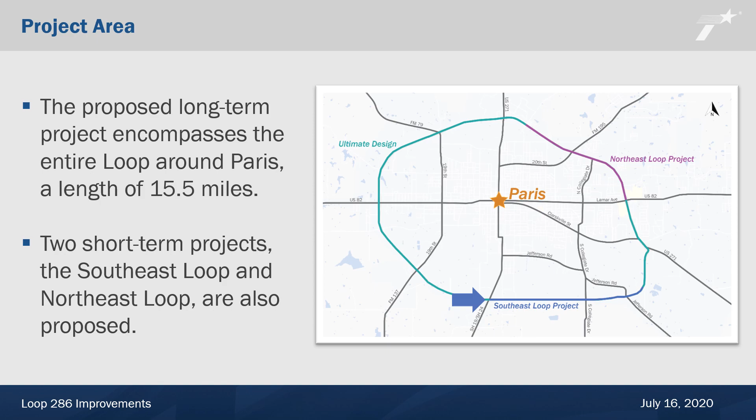The proposed long-term project, referred to as the ultimate design, includes improvements for the entire loop around Paris, a project length of 15.5 miles. Two short-term projects that align with the ultimate design vision are also proposed and include improvements for the Southeast Loop, shown in blue, and Northeast Loop, shown in purple.

Since the project began in September 2018, the department has worked to collect information about needed improvements, develop alternatives, and seek input from the public and key stakeholders on proposed improvements for Loop 286. The project team developed various alternatives for Loop 286 that were presented at a public meeting in April 2019. The department used feedback from this first public meeting to help select a preferred alternative and begin detailed schematic design.

Following this public meeting, the department will develop environmental documents for the proposed interim projects and finalize schematic designs for improvements to the entire loop. The department has tentatively scheduled a public hearing for the fall of 2020 and anticipates completion of environmental studies and schematic designs for the Loop 286 Improvements Project in the spring of 2021. However, all dates are subject to change.

Public involvement has been an important part of the Loop 286 Improvements Project. At the public meeting held in April 2019, the department gathered initial input on current issues and potential improvements to Loop 286. In addition to written comments received during and after the public meeting, the department collected feedback through an interactive electronic survey. Public comments and survey responses showed that enhancing safety, reducing congestion, and economic growth were top priorities for improvements to Loop 286.

Now that we have reviewed the project location, purpose, timeline, and need, we will provide more details about the proposed improvements, starting with the ultimate design, which encompasses the entire loop around Paris.

The ultimate design is a long-range plan that serves as a blueprint for the future of Loop 286. Funding for the entire ultimate design has not been identified. However, smaller segments of the design could be completed as funding becomes available.

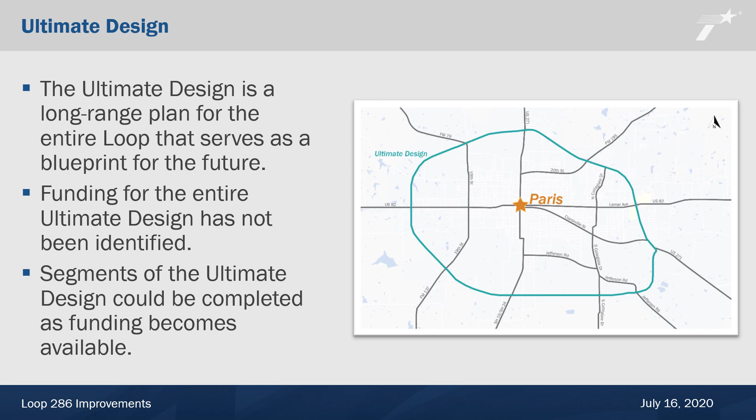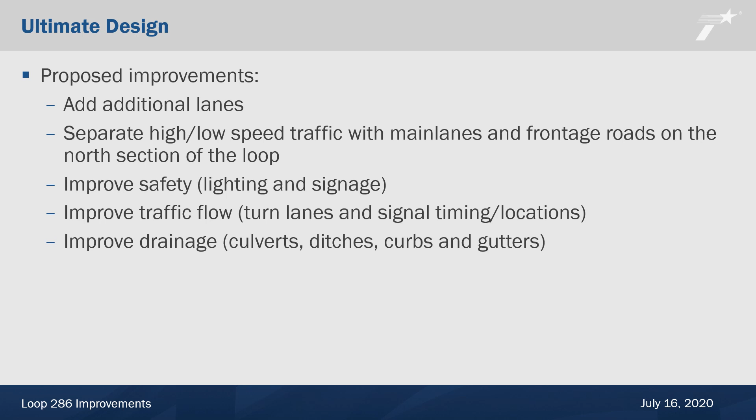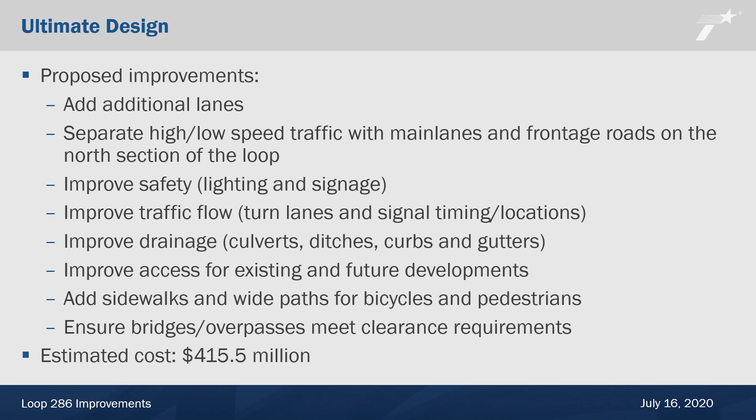Proposed improvements for the ultimate design include adding additional lanes, separating high and low speed traffic with main lanes and frontage roads on the north section of the loop, improving safety with additional lighting and signage, improving traffic flow with additional turn lanes and adjustments to signal timing and locations, improving drainage by adding culverts, ditches, curbs, and gutters, improving access for existing and future developments, adding sidewalks and wide paths for bicycles and pedestrians, and ensuring bridges and overpasses meet clearance requirements. The estimated cost for the ultimate design is $415.5 million.

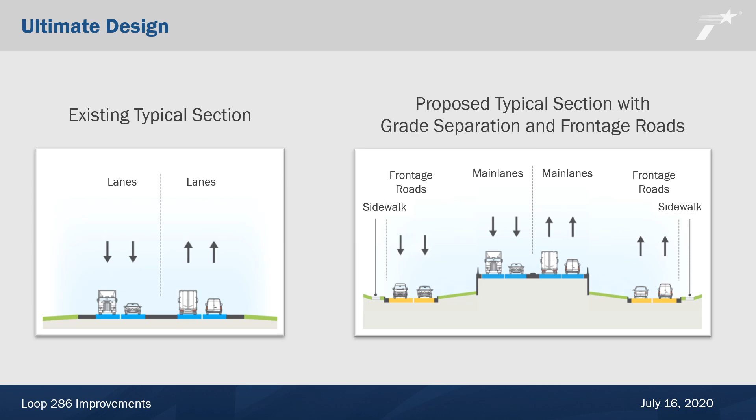The proposed ultimate design will be a grade-separated roadway with 4 elevated main lanes and frontage roads on each side, similar to the image shown on the right. The elevated main lanes allow high-speed traffic to bypass intersections, while the frontage roads allow slower moving traffic to safely access residential and commercial developments. The roadway improvements also include sidewalks and wide paths for bicycles and pedestrians.

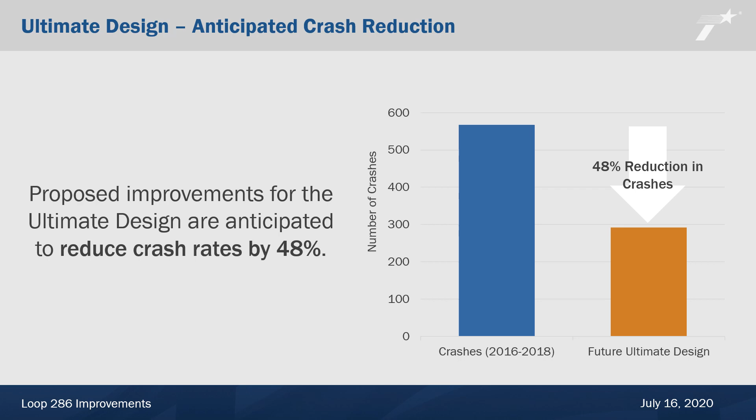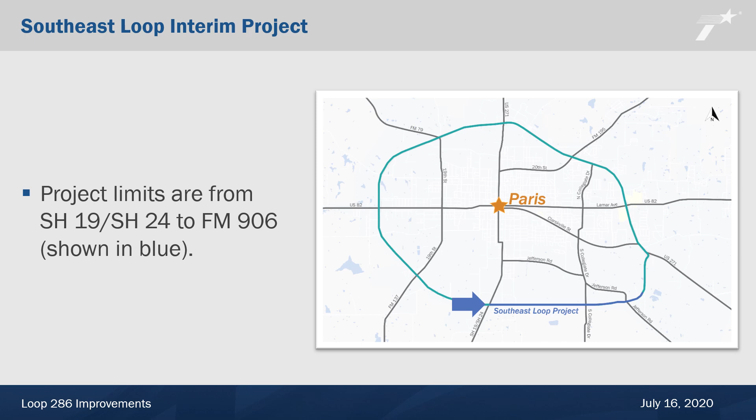Since funding for the entire ultimate design has not been identified, the department is proposing 2 short-term projects that could be completed as soon as funding becomes available. First is the Southeast Loop Interim Project from SH19, SH24 to FM 906, as shown on the map in blue.

Proposed improvements for the Southeast Loop Interim Project include expanding the roadway to 4 lanes. This is the only section of Loop 286 that is currently a 2-lane roadway, which causes a pinch point for traffic, and adding a wide path for bicycles and pedestrians.

Improving the intersection of South Collegiate Drive near Paris High School. This intersection has been identified as a prioritized area for safety improvements due to severe crashes that have occurred in recent years. The estimated cost for the Southeast Loop Interim Project is $20.2 million.

Crash data for the Southeast Loop shows that crashes are not as frequent as the Northeast Loop, but are typically more severe, which makes it a prioritized area for safety improvements.

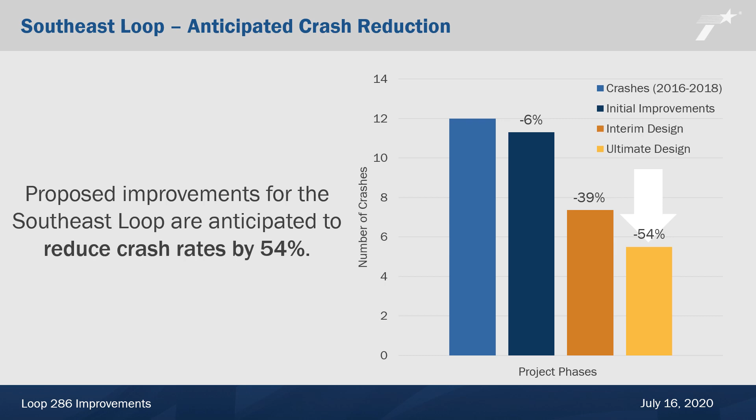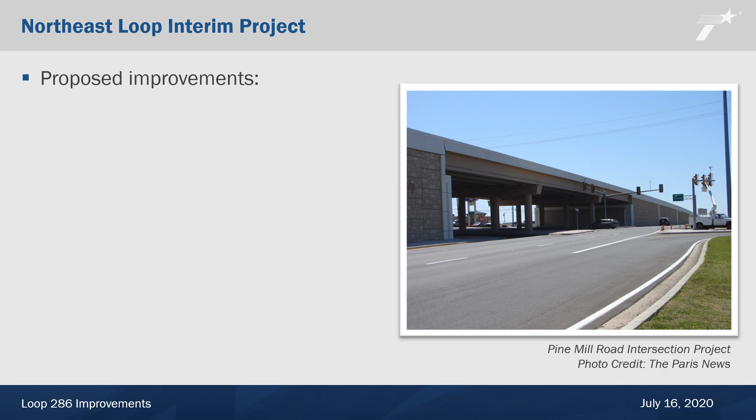Proposed improvements for the Northeast Loop Interim project include adding lanes and an overpass at North Collegiate Drive, adding sidewalks and paths for bicycles and pedestrians, improving safety with lighting, advance warning signs, and flashing beacons, and improving drainage by adding culverts, curbs, and gutters.

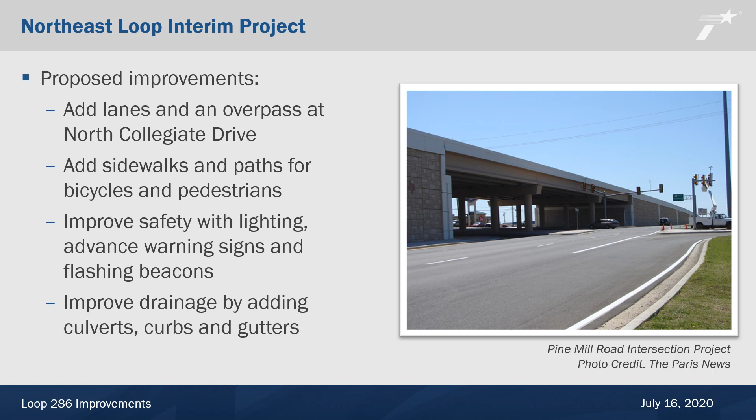Improving traffic flow by adjusting signal timing based on traffic needs, installing traffic signals at some stop-controlled intersections, adjusting the number of left turn and through lanes based on traffic analysis, and improving driveway access for existing and future developments.

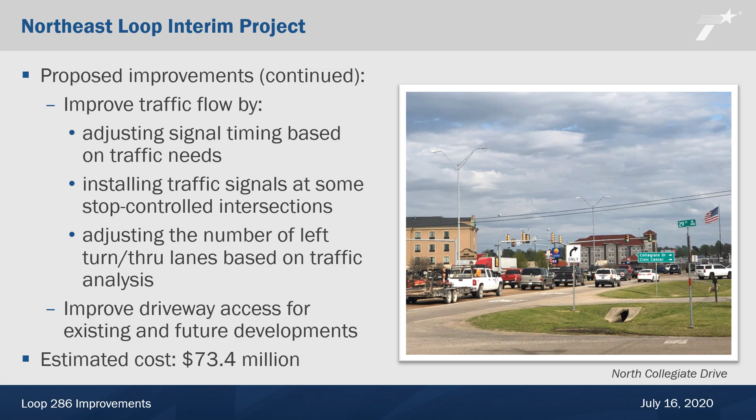The estimated cost for the Northeast Loop Interim project is $73.4 million.

Predictive modeling shows that proposed short-term improvements for the Northeast Loop will reduce crashes by 46%, shown on the chart in orange. Proposed long-term improvements will reduce crashes for the Northeast Loop by 65%, shown on the chart in yellow.

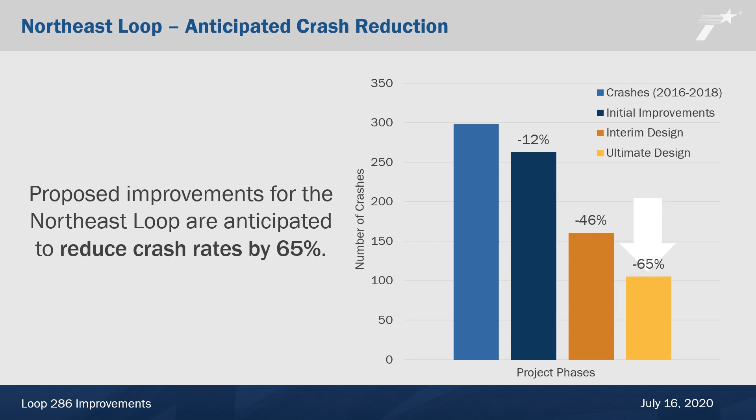Detailed analysis of crash data also shows that proposed improvements for the Northeast Loop Interim project will reduce crash rates at major intersections within the project area. As previously mentioned, the area surrounding North Collegiate Drive accounts for 1/3 of crashes on the loop.

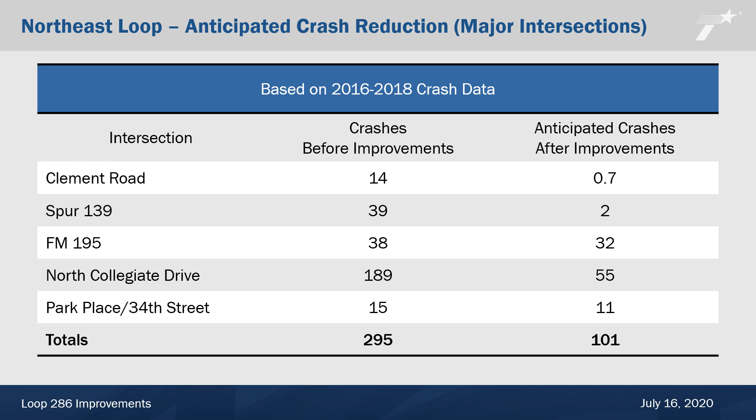Predictive modeling indicates that the Northeast Loop Interim project will decrease the number of crashes at North Collegiate Drive from 189 to 55, which is a 70% reduction in crashes.

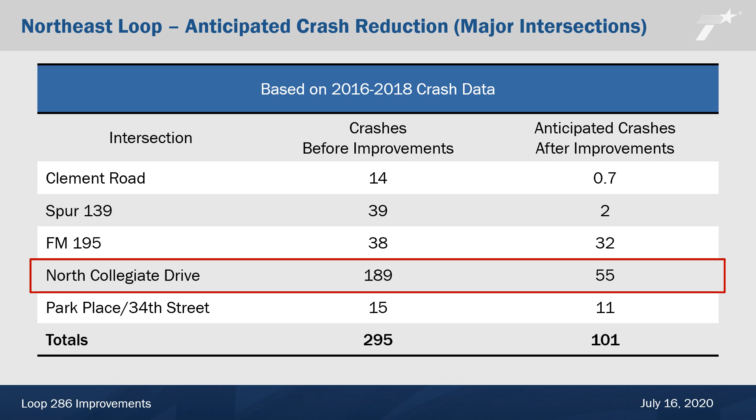The Texas Department of Transportation Loop 286 Improvements Project adheres to the National Environmental Policy Act, known as NEPA. In a memorandum of understanding between the Federal Highway Administration and TxDOT, the department assumed responsibility to review and approve certain assigned NEPA environmental documents.

The department is currently conducting environmental assessments and will prepare NEPA environmental documents for the Southeast Loop and Northeast Loop Interim projects. Environmental assessments for each of the interim projects must be completed prior to any construction.

The environmental assessment process includes defining the project purpose and need, identifying other reasonable alternatives, assessing impacts on the human and natural environment, and developing environmental assessment documents.

Examples of environmental features that may be evaluated during the environmental assessment include natural habitats and developed areas, historic properties and archaeological resources, streams, wetlands, and floodplains, and public lands, parks, and trails.

Once the environmental assessments are complete, an environmental document for each interim project will be available for public review and comment following a public hearing that is tentatively scheduled for the fall of 2020.